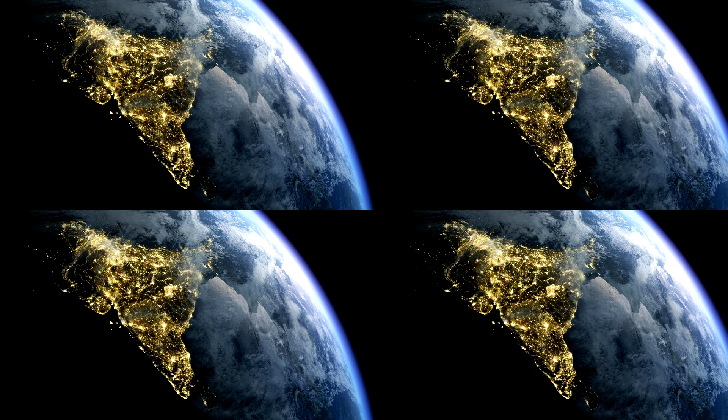So over the next 25 years, we will need to build new cities for 2 billion people. And if you take the US for comparison, that's building the entire US 6 times over with every nut and bolt and house and dog shed. Or if you take India, that's 4 times that. If you take the Bay Area, including San Jose, San Francisco, various bridges, that's 240 times over in 25 years. That's about the time when I intend to retire, so I will see most of that.

And the challenge is not so much global population growth; you will see that we will plateau at around 10 billion very soon. It's urbanization. To get the world into a work-sharing society, people need to communicate, and that's essentially why we chose to live in cities when we left hunting and gathering behind us. And if you see where urbanization needs to happen, it's interesting. It's predominantly in parts of the world that are catching up.

So everyone wants to get where Japan, the US, and Western Europe are, around the 80-85% mark. China is now above the world average, which is about 56%. India has to catch up, and not even on that graph is sub-Saharan Africa, which will be the biggest future growth region. China needs cities for about 200 million still. India, 300 million, that's all in the next 25 years. And sub-Saharan Africa, in excess of 600 million during the remainder of my professional career.

And the challenge with that is it's all new cities, right? So it's not including a single building that will need to be replaced. The lifetime of a building is between 20 and 40 years, so you can add buildings for 1 billion people on top of that. Two challenges go with that: feasibility and, perhaps surprisingly, identity.

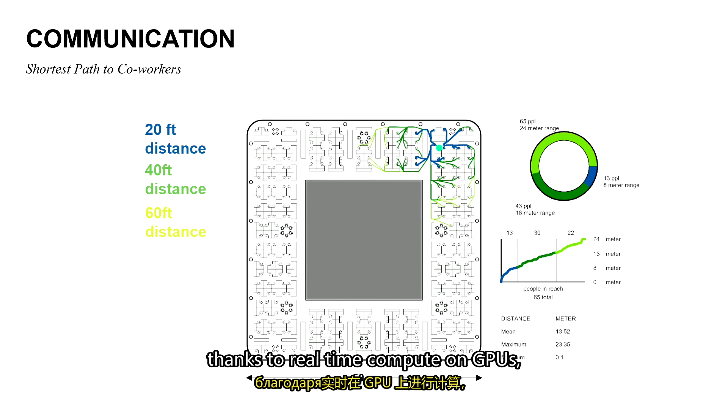And if you think about cities being communication engines and offices the place where that communication happens for the purpose of our economy, that is something that should be at the center of every building design. Unfortunately, when you run the math on it, and you can do that quite efficiently nowadays, thanks to real-time compute on GPUs, you find out that most buildings work not very well for that purpose. So what we showed on the previous slide is actually proximity. That is in response to the Allen curve parameters.

You can then overlay that with different parameters such as human comfort, its orientation, like no one likes to sit in a corner, no one likes to sit to the back of an audience. And that essentially means that in the buildings we design today, like the typical high-rise building with a core in the middle, about 65% of the space is used efficiently, and 35% is actually stuff that doesn't really cater to what you built the building for in the first place, which is communication and IP generation.

So we can say that the building as we know it is a subject that we could improve drastically without reinventing a single technique in structural design. We could just build 35% less of it, or better, and reduce the mass of our cities just by looking at the efficiency of the layout of our buildings.

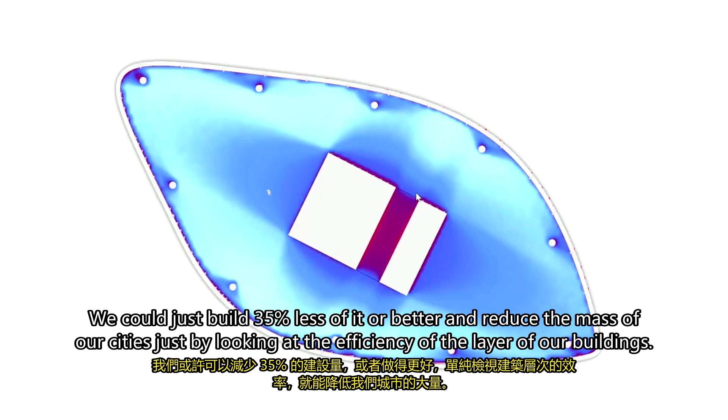And what we can do nowadays with real-time GPU compute, so this is code that we've been porting to CUDA, we can now give designers real-time feedback whilst they model their buildings on parameters like communication efficiency, human comfort levels. That's, I think, switching to yellow at the moment, so that's the comfort graph. So we can intuitively get real-time feedback on the quality of the spaces that we design, and you see that this also works with organic shapes.

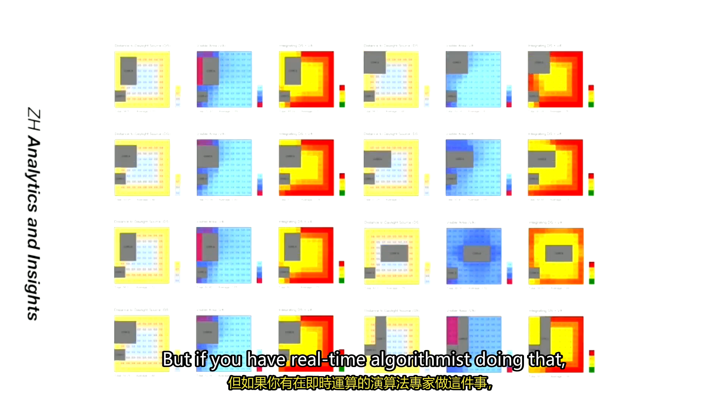And if you just look around here, no one sits in a corner, you might as well not build it and save a lot of material in the course. And this is a double-digit optimization potential you will hardly find in any developed industry. But if you have real-time algorithms doing that, you can also use reinforcement learning to automate that.

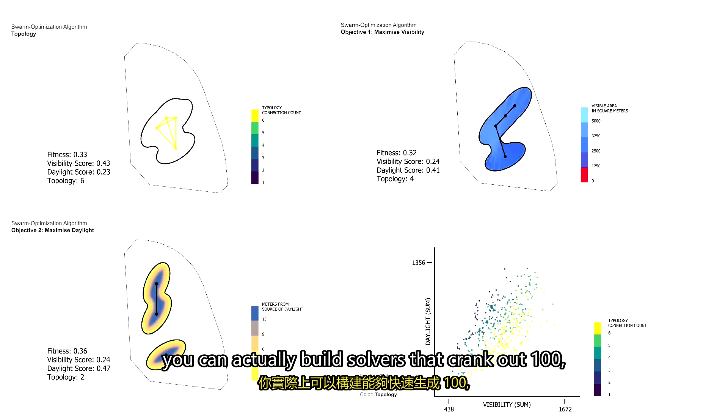So if you take the problem of where to place a core in a building or what shape a floor plate should have to work for the purpose of a building, which in the case of an office is communication, you can actually build solvers that crank out hundreds of thousands of options and optimize for certain parameters. And that results in forms that are very different from the kind of building that you see in a typical CBD. So in this case, this is a study we did for an office tower.

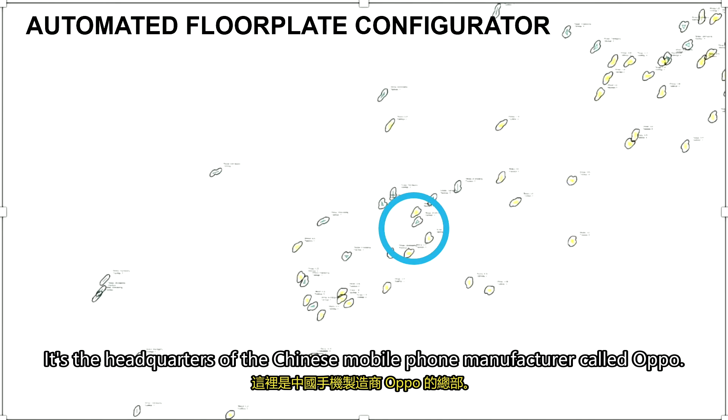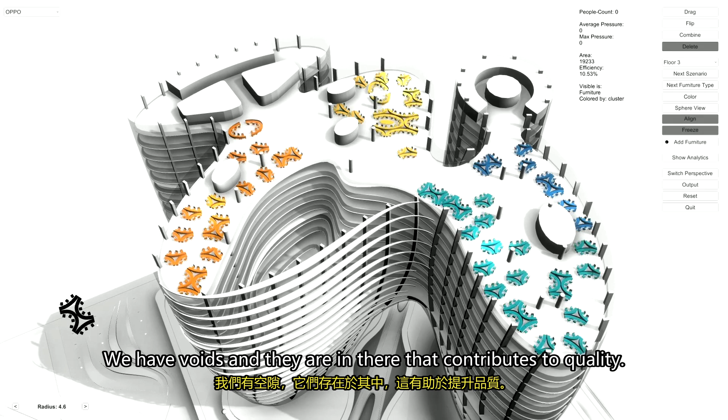It's the headquarters of the Chinese mobile phone manufacturer called Oppo, and we're building this in Shenzhen now. And the sweet spot of the different parameters, which were mostly about team organization and communication in the building, was a shape like this. We do not build what doesn't work for that purpose. So it looks a bit like a Swiss cheese. It's very airy, it's very light. We have voids in there and daylight in there that contributes to quality. And we can organize teams according to the social network graph of the company quite efficiently on those floor slabs.

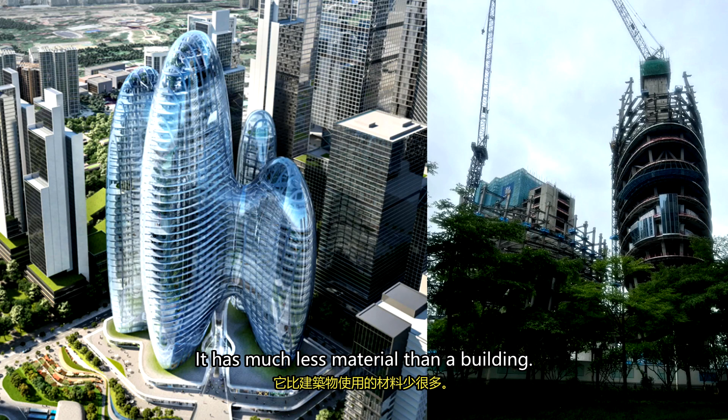Just quickly show you how this looks like. So this is how it will look like. It's perforated. It has much less material than a building. It's lighter through that, and it's actually coming up. So hopefully soon we can see and get some metrics in return on how that works.

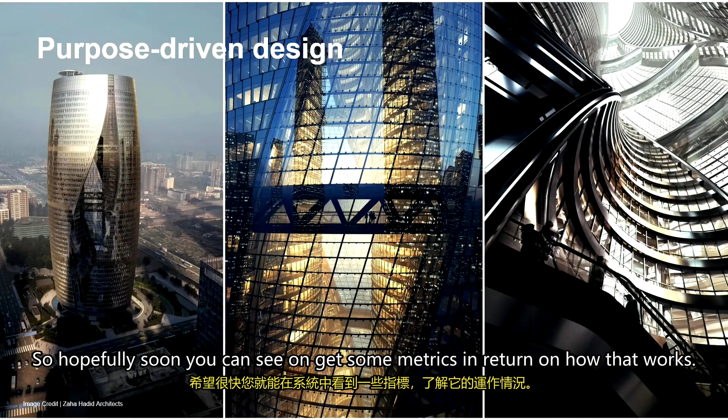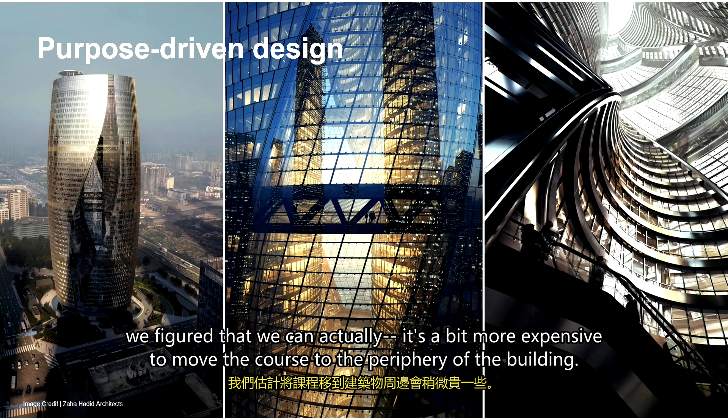Or here, this may look like a standard building from afar, but if you look closer, this is the building that we finished in Beijing. These are all photos. These are not renderings. With a very similar methodology, we figured that it's a bit more expensive to move the cores to the periphery of the building, but we get much more efficient communication in the building in return. And by providing those metrics, we were able to convince our client to go for this rather unusual approach.

And what we have in the center, where you typically have a core that you cannot see through, is a 200-meter tall atrium. It's the tallest in the world at the moment. And that means I cannot only look across my floor plate. I'm in an organization. I can look 16 floors down and wave to someone there. So I have a much more present state within my organization and can basically work in a dense urban situation like in a kind of medieval marketplace where I can see what everyone is doing. So it has massive benefits to communication within organizations.

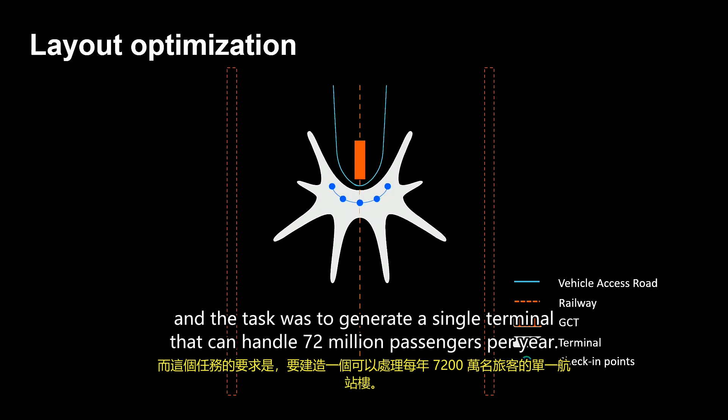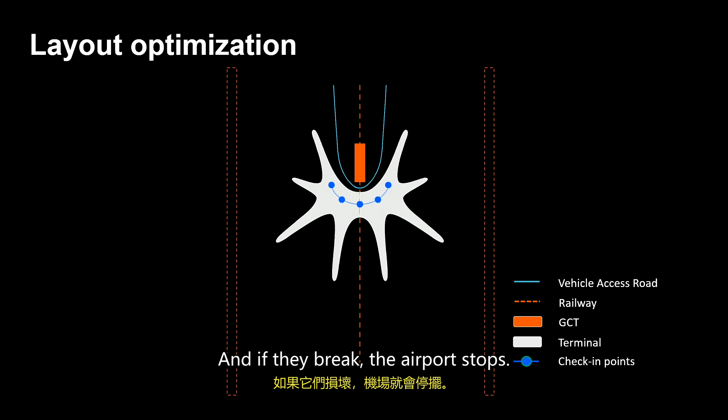Or we can use computer graphics and accelerated compute for layout optimization of large buildings. So this is a good example where we can optimize buildings for pedestrian commute times. And to give you an idea, this airport is in operation since 2019, and the task was to generate a single terminal that can handle 72 million passengers per year. The reason why the desire was to have a single terminal is because in a normal airport you have APMs, automated people movers, these little trains going back and forth, and if they break, the airport stops. And if you are able to get all of that under one roof and everyone can walk everywhere, you solve that problem, or you take that risk away.

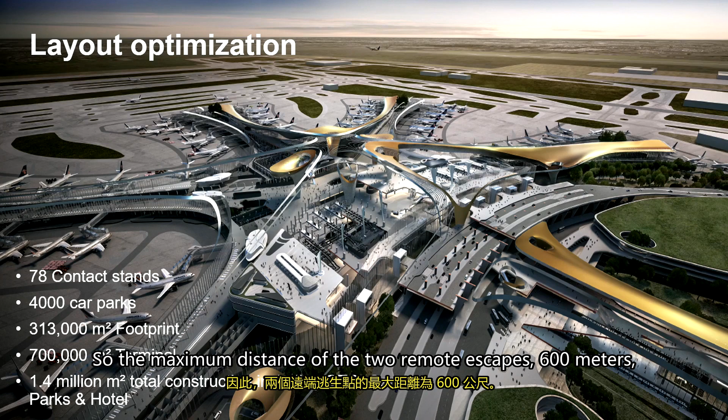And we optimized, with very similar algorithms, the geometry for walking distance. So the maximum distance between the two remotest gates is 600 meters, 15 minutes walking. And if you look at the capacity, this is almost on par with LAX. LAX is about 80 million passengers per year, so within 10% of that. LAX has 9 terminals, and here we get it into one single building, about 700,000 square meters.

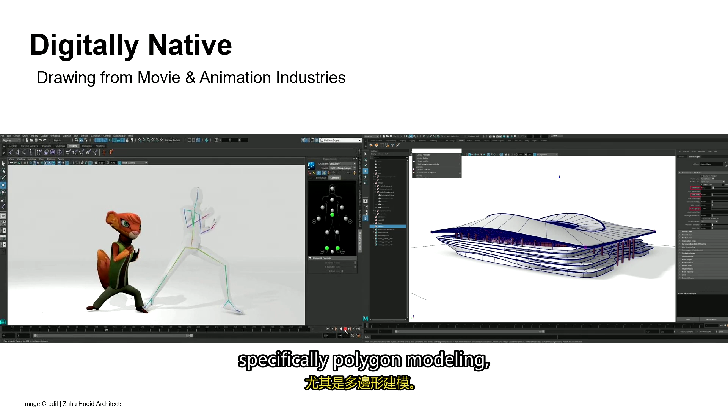So what are we doing in a tech conference? We can look at the technology stack we are using to power all of these buildings. Historically, technology at Zaha Hadid Architects has been in the service of the user experience. But we use a zoo of software, borrowing from various industries, not only AEC, but gaming, movie and animation, to create our buildings. And this creates a lot of source files and also a lot of multi-format files. We are one of the few architectural companies that also borrow from the animation and gaming industry. So we use Autodesk Maya for modeling, specifically polygon modeling, which is very intuitive for our designers to model and iterate quickly.

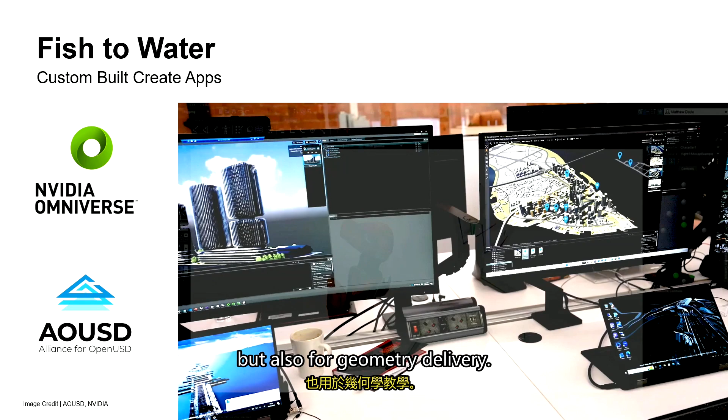So in that sense, you saw the gamut of software we use. We were already taking a look at Universal Scene Description, and when Omniverse and the Alliance for OpenUSD was created, it was natural that we jump onto it. So with all the APIs of the NVIDIA Kit app, we were able to create our own version of that application for both geometry creation and geometry delivery. What Omniverse enabled us was to create a repository of geometry and toolkits, bringing all of them into one location. These toolkits span multiple domains: geometry processing, digital and robotic manufacture, environmental simulations, data visualizations, and AI.

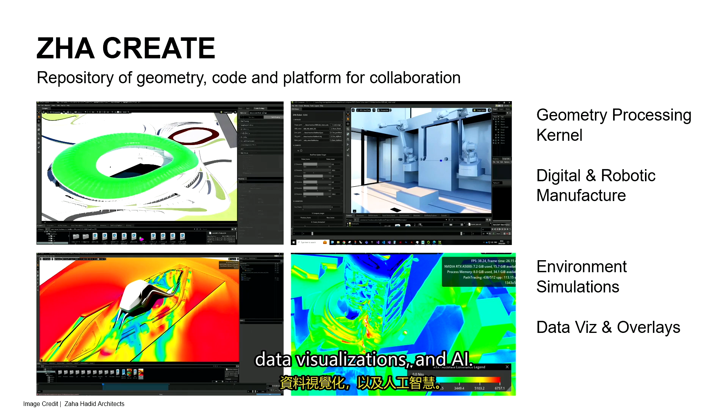So diving a bit deeper into each of those aspects, looking at the geometry kernel. This kernel is called ZSpace. This is a kernel we have been developing for the last 10 years, looking at both content creation, where we are borrowing from geometry processing and computer graphics, looking at robotic and digital manufacture, but at the same time developing tools for later stage delivery of the project, looking at geometry optimizations or rationalization for manufacture,

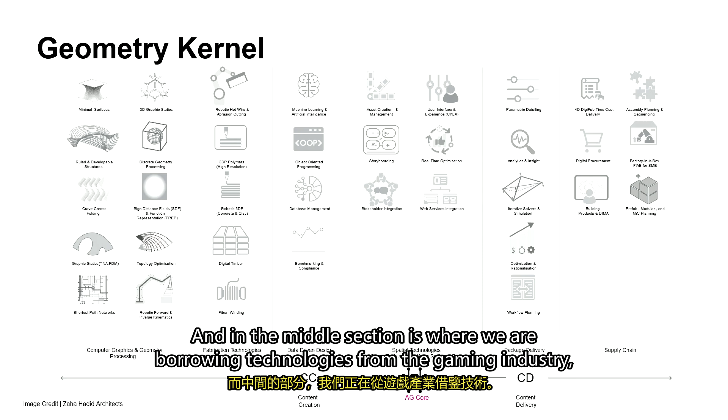the sequence of construction, etc. And in the middle section is where we are borrowing technologies from the gaming industry, looking at game tech and platform design, which we will touch base on in a bit. So the research borrows from multiple institutes, specifically looking at architectural geometry. We have collaborative setups with corresponding institutes which look into that, like TU Vienna, where the architectural geometry group is, ETH Zurich, where the Block Research Group is, and also Carnegie Mellon, and so on.

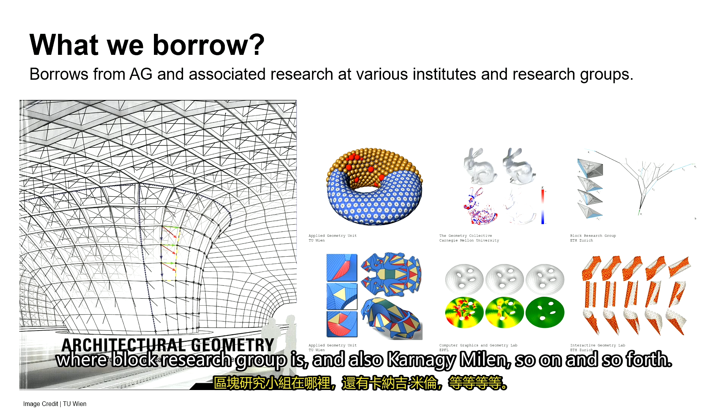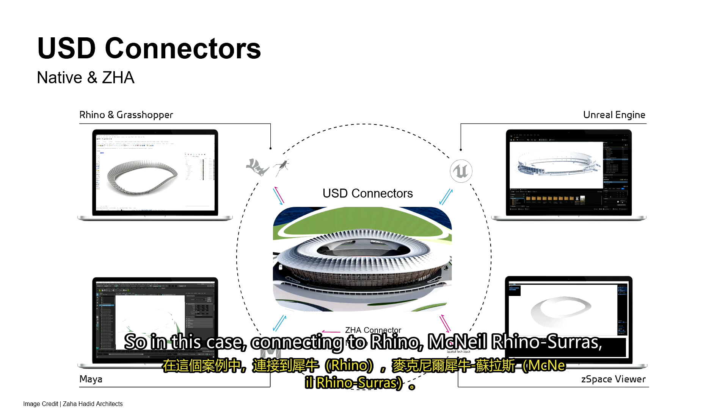So when we started looking at USD, we were looking at what are the native connectors. There were native connectors for Maya and Unreal, but we had to build our own custom connectors where they were not available, or if the vendor is still in the process of making them. So in this case, everything in magenta are custom connectors we built. For example, connecting to McNeel Rhinoceros, we built our own connection.

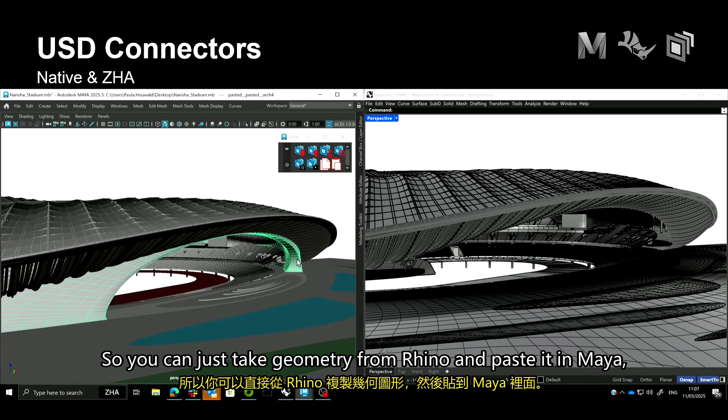So what this has enabled is, because we build our own connectors between the various platforms, it's as simple as copy pasting from one platform to another. So you can just take geometry from Rhino and paste it in Maya, or the same thing from Maya to Omniverse, and so on. It becomes very easy for the designer to navigate between the various platforms we have in the office. We have tested these workflows across multiple project scales, starting from small scale pavilion projects to larger scale stadiums and infrastructure projects to even master plans.

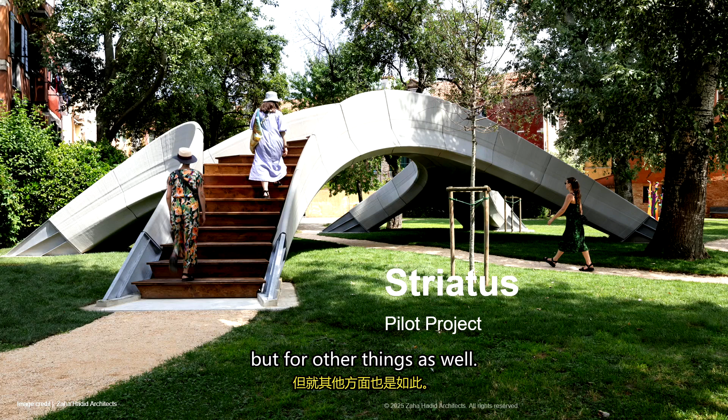As with all technologies, we start with some small technology demonstrators to showcase a proof of concept. And in this case, Striatus was a proof of concept we wanted to develop not only for USD, but for other things as well. Typically, we do these kinds of small-scale projects to test technology because they become the beacon for making it into commercial projects. From our experience, the distance between a research project and commercialization has been about 5 to 8 years.

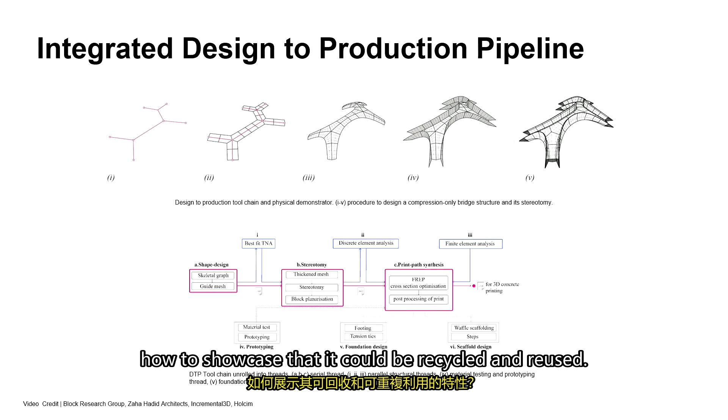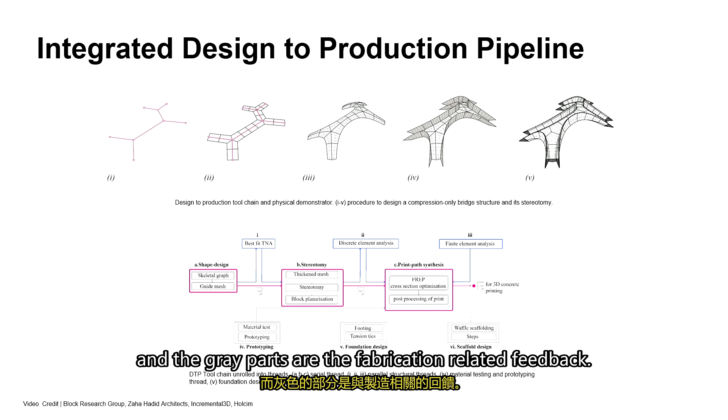So in this case, we were looking at concrete and trying to make it sustainable. These two words generally don't go together if you know about concrete, but the main objective of the project was to showcase the sustainability aspects of concrete by reducing the material, and to showcase that it could be recycled and reused. So how were we doing this? This was done through an integrated design to production pipeline between designers, engineers, and fabricators. The pipeline you see in pink are all the design procedures, interspersed with engineering feedback, and the gray parts are the fabrication-related feedback.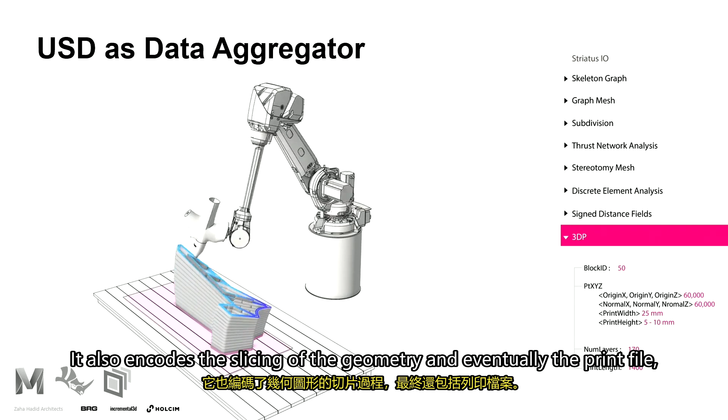So in this case, we were using USD as a data aggregator. You can see on the right, the design procedures were all captured into the file format. Every step, whether it is structural analysis, fabrication-related information, or design procedure, was captured. These are all sequential design decisions we make in an architectural project, and it was important to capture and embed them so that we don't lose that data. It also encodes the slicing of the geometry and eventually the print file, which is sent to the robot. All of that captured in one single file.

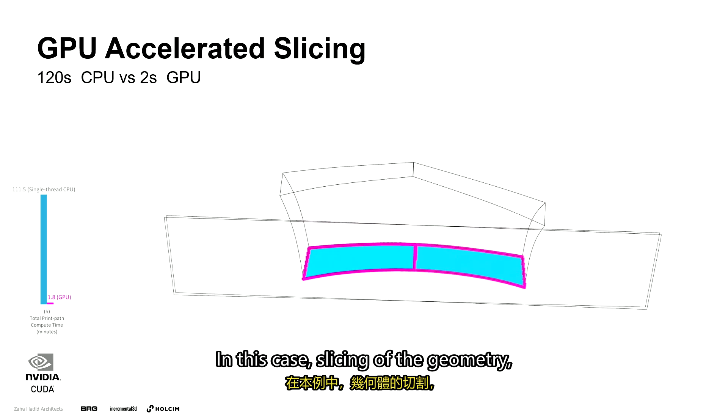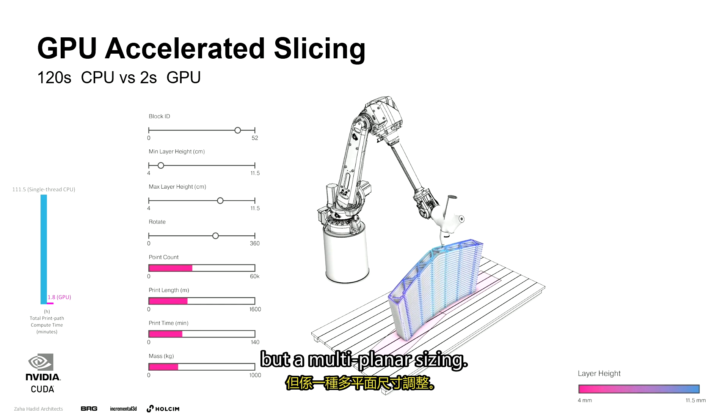Apart from that, we're also looking at NVIDIA CUDA for GPU acceleration. In this case, slicing of the geometry, which might take up to 120 seconds on the CPU, is now accelerated to 2 seconds on the GPU. But you can also see that this is not a simple slicing in Z, but multi-planar slicing. Each of the planes is actually perpendicular to the force flow it is going to experience in the final design of the bridge.

What this enables, because you are perpendicular to the force flow, is to minimize and deposit material only where it's required. This also got rid of the requirement for steel reinforcements. So this is pure concrete, with no steel reinforcements to keep it in place.

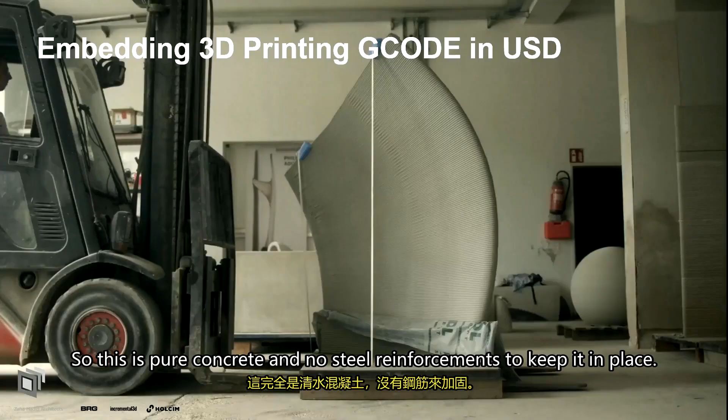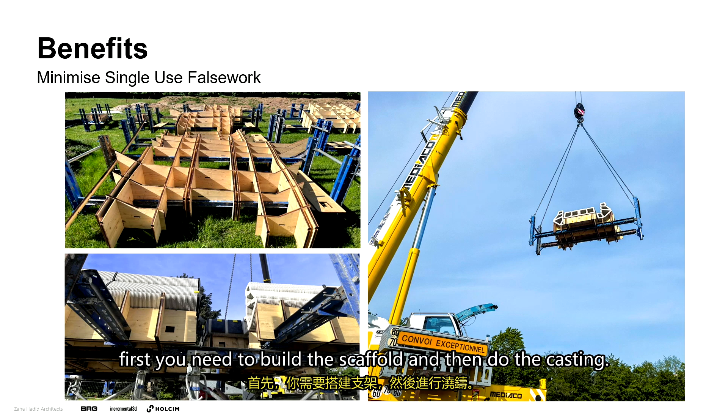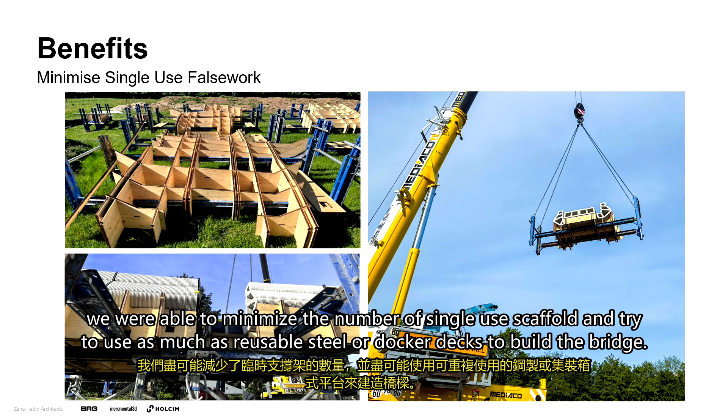Such technologies, because of that integrated design to fabrication pipeline, are enabling us to minimize single-use falsework. If you have experience doing concrete, first you need to build the scaffold and then do the casting, and if the scaffold is single-use, it becomes waste. Because of the integrated pipeline, we were able to minimize the number of single-use scaffolds and use as much reusable steel docker decks as possible to build the bridge.

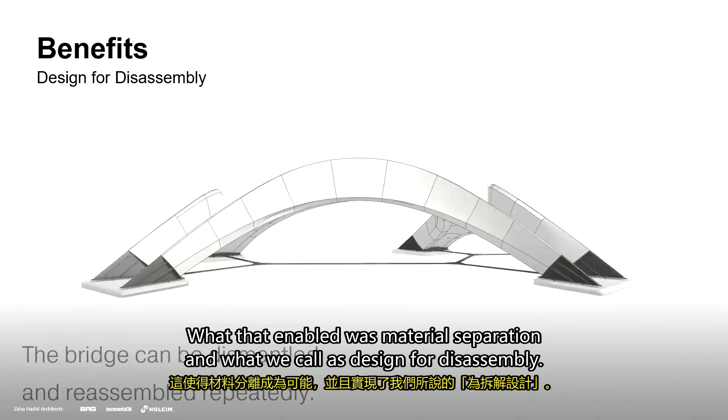In terms of material separation, I mentioned there was no steel reinforcement, but there was steel at the anchors. What that enabled was material separation, what we call design for disassembly. So you can disassemble the bridge once its use case is done and reassemble it somewhere else, showcasing reuse of the same components. But at the same time, because it's materially separated, you can also reuse the materials themselves.

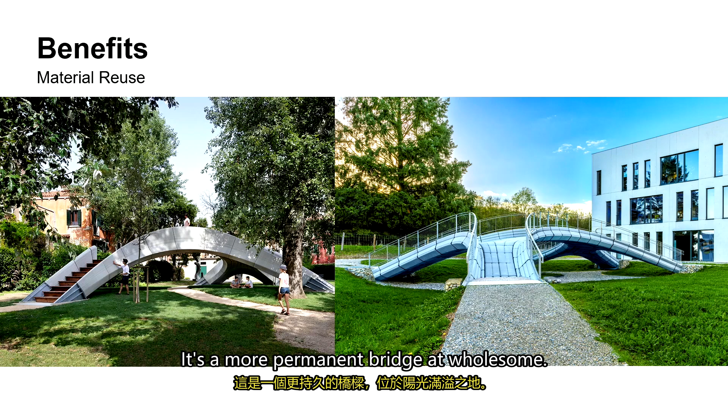This was in 2021, we did the first version of the bridge for the Venice Biennale. It was there for about 6 months, then it was easier to crush and repurpose it into a new, more permanent bridge at Holcim. So we reused 80% of the material from the first version to build the second one.

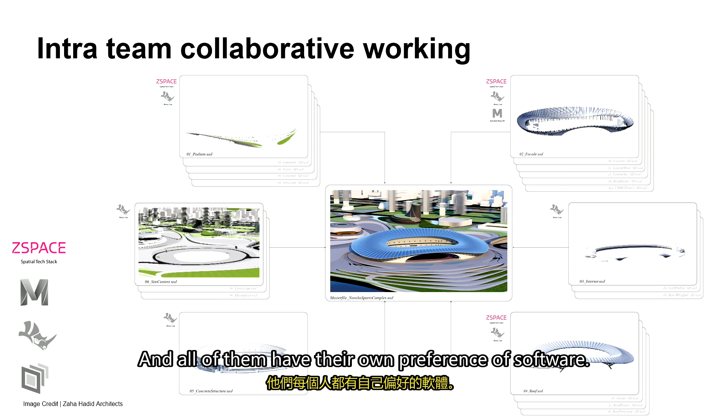Moving on to larger scale projects, how we are using Omniverse and USD in larger scale projects. In this case, it's enabling intra-team collaborative working within ZHA. We have people looking at landscape design, facade, structure, roof, etc., and all of them have their own preference of software. We saw the zoo of software we were using - some are interested in Rhino, some in Maya, some in Blender, some other softwares.

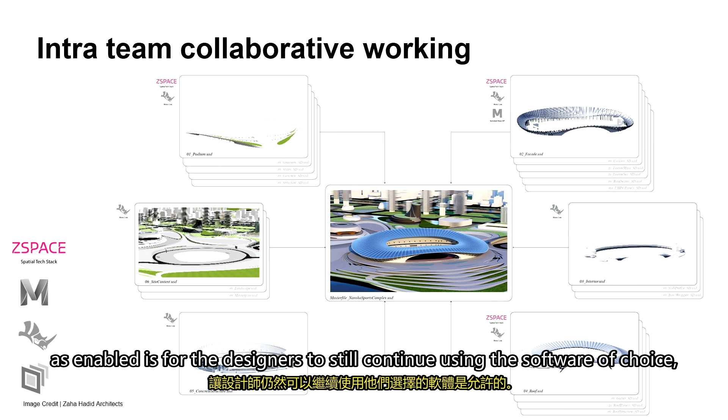So what USD as a file format has enabled is for designers to still continue using the software of their choice, but create an aggregator in Omniverse where someone at the project managerial level is just looking at that master file.

What this setup enables is quick and multiple iterations whilst being aware of the other scopes. This is going on quickly, in this case looking at facade design, but whilst being aware of the structure, or looking at a cable net roof of a stadium whilst being aware of what it's going to latch onto.

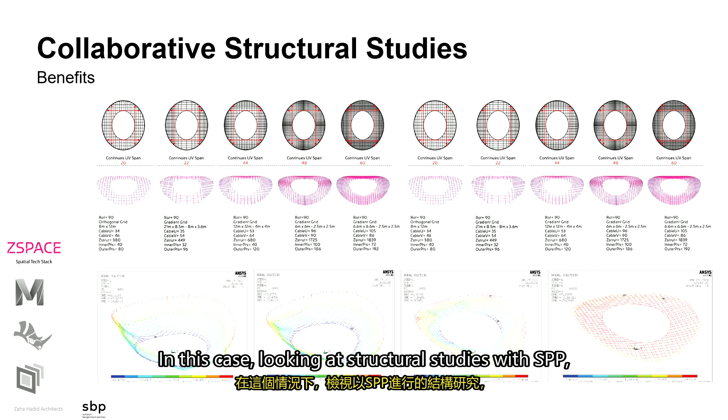It's not only intra-company, it could also be collaborative studies with engineers - in this case, looking at structural studies with SBP, looking at various topologies we as designers want to explore, while getting feedback on the structural performance of each typology, so you can choose the best one.

Can we press play on the video? This is a roof of the stadium. I'm not able to play the video. It's not working. Are you able to press play there? Just move the mouse pointer to the slide, and there should be a bar, and in an ideal world you can press play. Nope. I think we need to skip that.

What you would see there is a real-time solver for geometry optimization. When interacting with the design model, we use compute resources in Omniverse to planarize the panels. These are quad panels, so by definition they are not necessarily planar, and the difference between a planar panel and a curved panel in construction is a cost factor of about 10. You have a quite complex multivariate equation to solve to get your panelization into shapes that you can feasibly build. With GPU compute, we can solve these problems in 10 to 15 seconds, meaning we can run an enormous amount of iterations over shapes that with traditional technology would take literally weeks to assess.

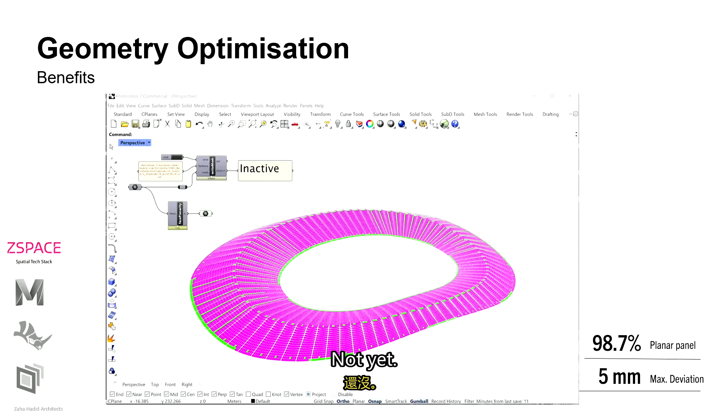But yeah, I think the PowerPoint is stuck, so it may not be going. Can we advance still, or has it all crashed now? Can you still advance the slide? No. Ah, there we go.

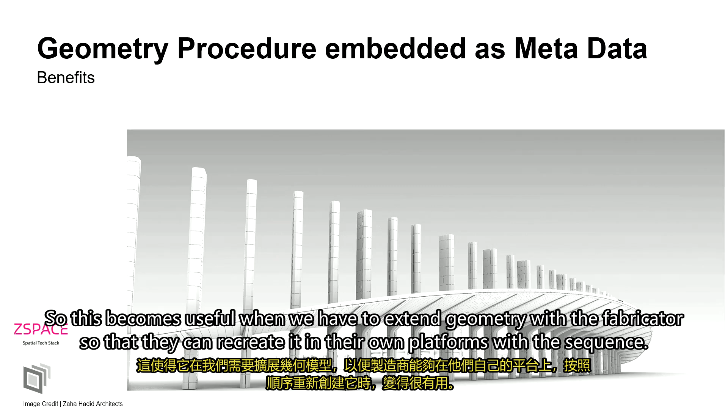The other aspect of geometry optimization is that we are able to capture the procedure of how the geometry was constructed as metadata in the same file. This becomes useful when we exchange geometry with the fabricator, so they can recreate it in their own platforms with the sequence - it's kind of like an IKEA manual of how to recreate the geometry.

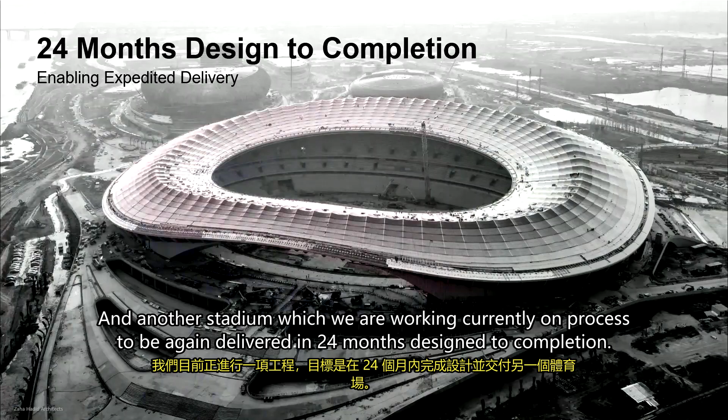What this enables is expedited delivery processes. This is a 60,000-seater stadium, which was designed to completion in 24 months, and this one is already complete now - showcasing the cable net roof. And another stadium, which we are currently working on, is in process to again be delivered in 24 months, designed to completion.

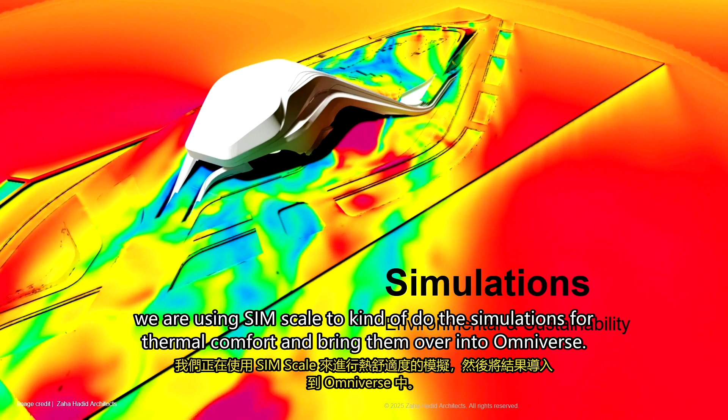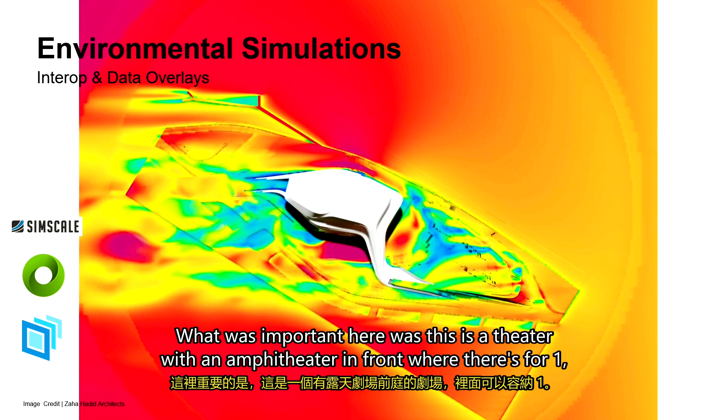Moving on, looking at the environmental simulation aspects. In this case, we are using SimScale to do the simulations for thermal comfort and bring them over into Omniverse for visualization. What was important here is this is a theater with an amphitheater in front for 1,000 people, and we wanted to capture the thermal comfort of that area.

And this is how the project looks. It opened in 2024, and you can see the amphitheater in front.

At the same time, we are also looking at the daylight simulations for the interiors to see how daylight is being captured. This is again inside Omniverse, trying to visualize the daylight comfort inside the building, and the same simulation was then built in actual. So this is how it looks on site now after the construction.

Another environmental aspect we are looking into is something called hotspot. Light concentration or hotspot is concentration of sun rays into one particular point in the context. If you remember, there was a project in London where the hotspot was actually burning a car or the gate of the neighbor. So it was important to capture these things in the pipeline.

Previously we had to send these things out to an engineer to get feedback, and it was outsourced. Now we can capture them in our in-house design pipeline. Previously one iteration took a week, but now with GPU compute, it's almost real time. You can get feedback on all the geometries happening in real time.

In this sense, you can optimize the geometry for the various solar concentrations and then rationalize the facade such that you are avoiding these kinds of concentrations. That's also part of the OPPO headquarters, which Niels was mentioning previously. This is the rationalized facade for it.

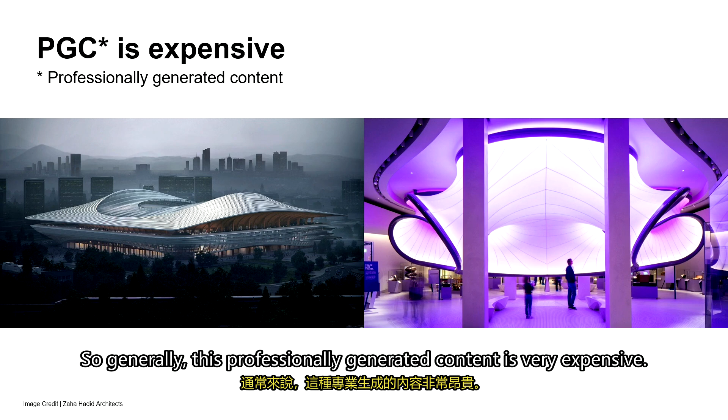Another aspect we actively work on is game technologies. In this case, we saw all of the professionally generated content for creating the framework. Generally this professionally generated content is very expensive, because you need specialist teams to work on these things over multiple periods of time, and at the same time it's also time intensive. You need to create all of these technology demonstrators, understand the drawbacks, and then plug it back into the design pipeline for the office to use.

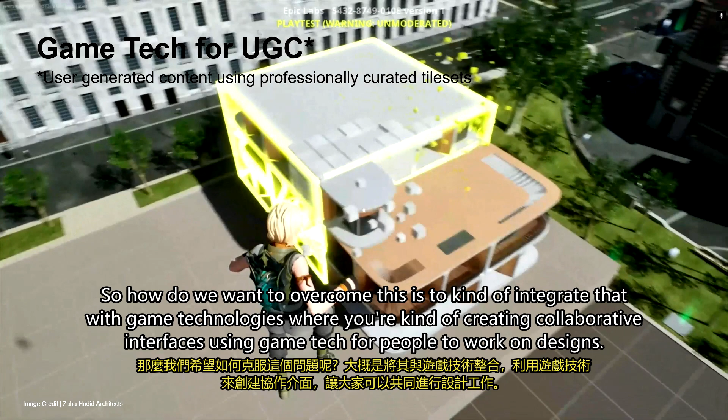So how do we want to overcome this? By integrating game technologies, creating collaborative interfaces using game tech for people to work on designs. You can then have multiple collaborators working and also crowdsource the problem.

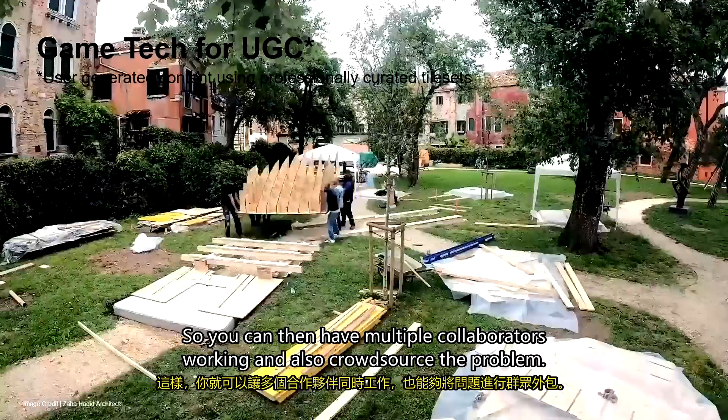What we are doing as designers here is to create professionally generated tile sets, which are curated for various use cases, be it offices, residences, commercial buildings, etc. And the gameplay enables these combinatorics to be explored.

In this case, you can see this was a collaboration we did with Epic Games, where this is a game where people in groups of 4 or 8 are collaborating to create a varied city. Previously, we identified that we had to create variation in new cities. This is one way to do it, because you can capture in a tile set the variation according to cities or based on its geographical location.

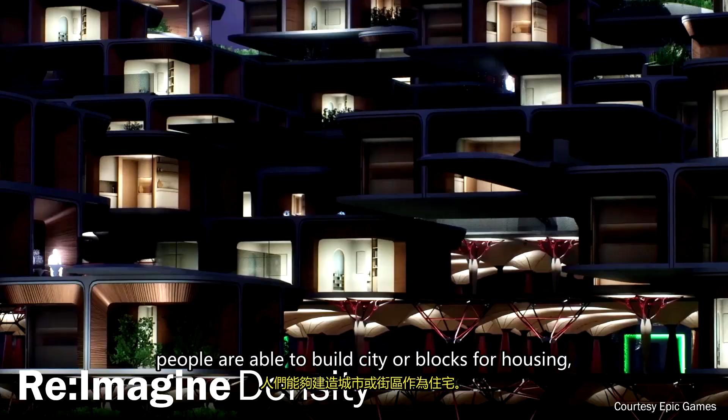It also enables capturing various mixed-use scenarios. In this case, each program is a different scenario, and through the gameplay, people are able to build a city or blocks for housing, looking at the density out there, so on and so forth.

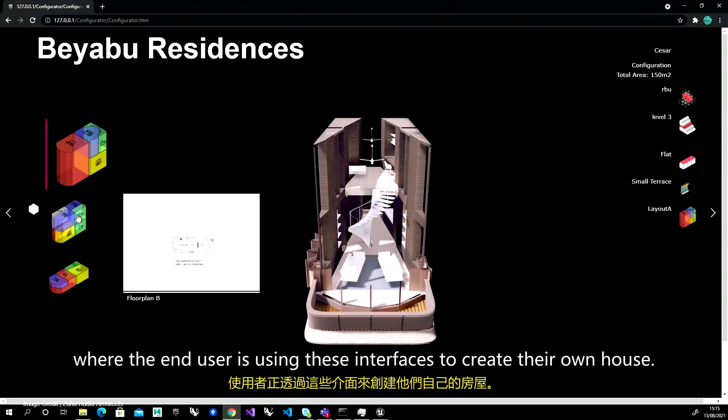But the same technology can also be adapted into configurators for smaller scale projects. In this case, the same game tech is adapted into a configurator on the web, where the end user uses these interfaces to create their own house. This was a project called Beyabu Residences in Roatan, where the end user logs into a web interface.

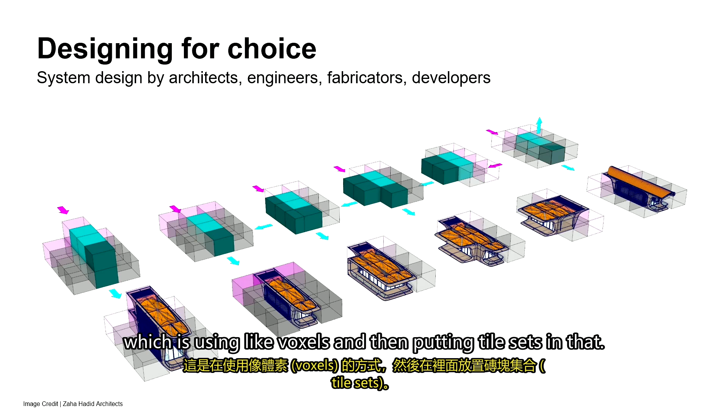We are using game tech, using voxels and then putting tile sets in that. So what it's enabling is for not only end users to create their own units, but also doing combinatorics of geometry to enable the variations possible, while tracking all the costs associated with that.

Another aspect we are currently exploring is generative AI. We actively use it within our production pipeline, looking at data sets of built projects and renders. This becomes the data set we train our custom LoRAs on, and these LoRAs are specific to exteriors, master plans, interiors, and graphic design.

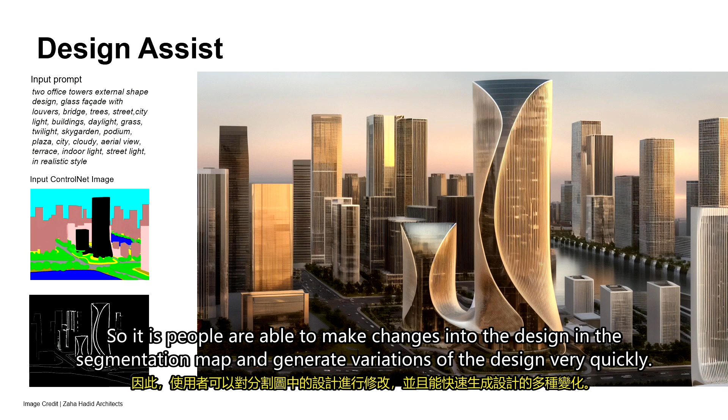This enables us to create ideations at a very early stage. People use it for ideation of design projects, but more importantly as a design assist tool, making changes in the segmentation map and generating variations of the design very quickly. Because it's embedded into our design pipelines, in Rhino or Maya, people are able to call these tools and create variations of the facades very quickly.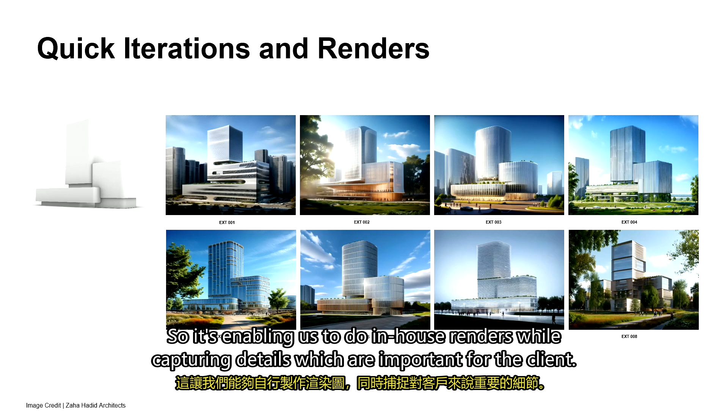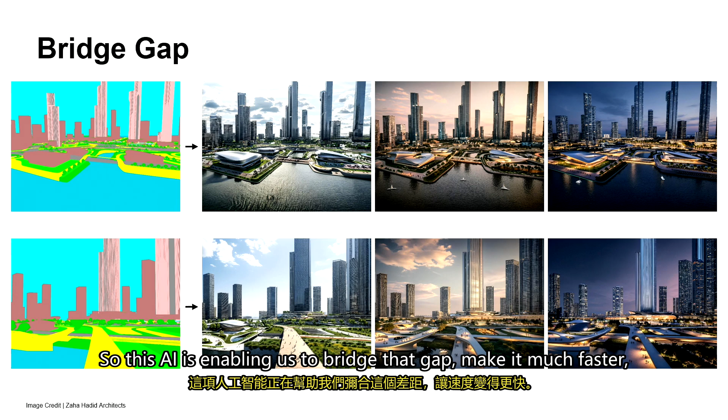So it's enabling us to do in-house renders while capturing details important for the client. This bridges the gap between the abstract models architects are working on and showcasing what is required for the client. Clients generally respond more to the renders and how it is spatially working, so AI is enabling us to bridge that gap, making the process much faster and smoother.

It's not only necessary for clients on physical construction projects, but also on the game side, the same kind of requirement for game design as well.

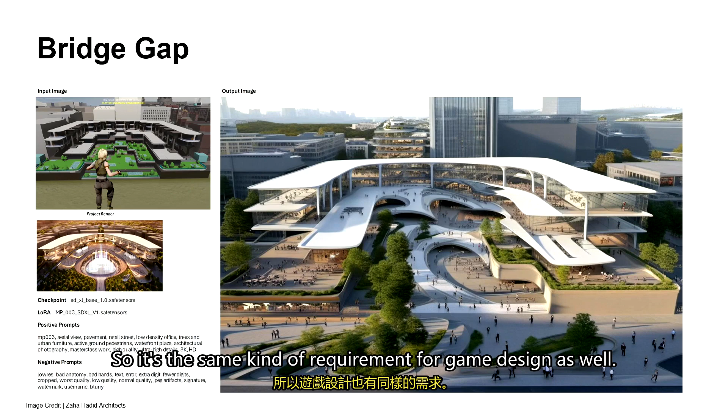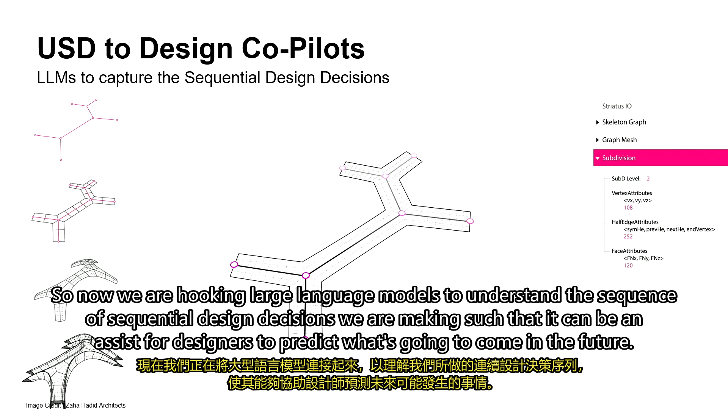More importantly, where we are heading with AI and USD is to create design co-pilots. We saw previously how we are capturing all the sequence of steps to create the procedural geometry. Now we are hooking large language models to understand this sequence of sequential design decisions we are making, such that it can assist designers to predict what's going to come in the future.

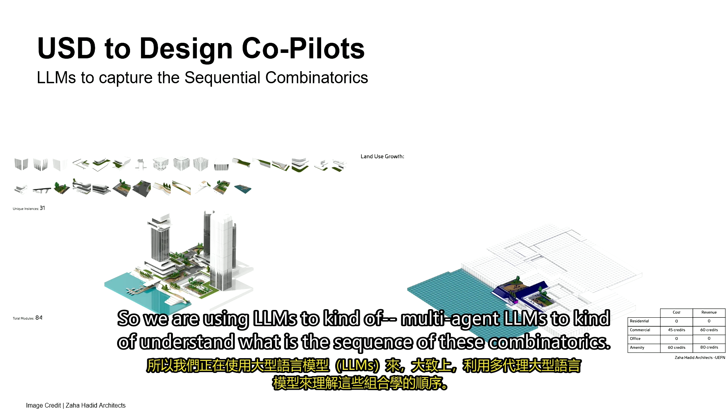At the same time, it's also looking at the sequential gameplay of the city and city master plans - on the right you can see the sequential gameplay. We are using multi-agent LLMs to understand the sequence of these combinatorics, so that before you release the game, an ML agent can run through all the possible game solutions and make updates as necessary.

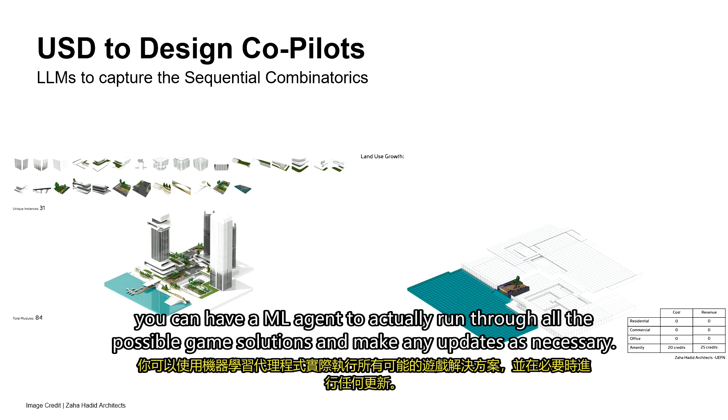It's also becoming an assist in predicting simulation results, looking at topology optimization, where as designers at a very early stage, you don't need 100% accurate results. Even 70 or 80% accurate is good enough. On the right, the prediction of topology optimization on a chair is about 60 to 70% accurate, which enables us to make sure we can iterate very quickly.

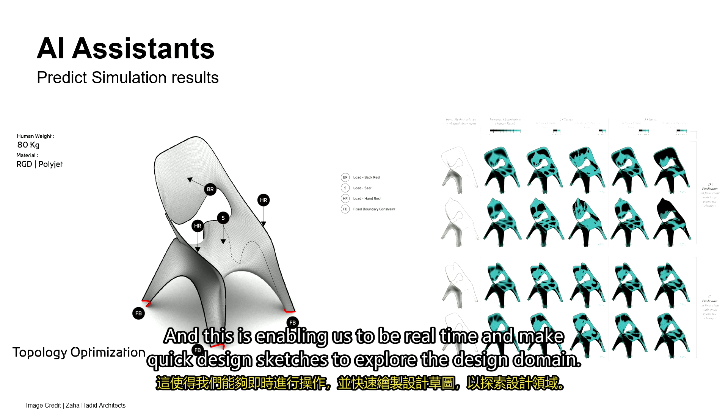Typically, topology optimization or finite element analysis takes a long time to run, and this is enabling us to be real time and make quick design sketches to explore the design domain.

Thank you. Oh, we are almost out of time, and I think we are landing bang on target.

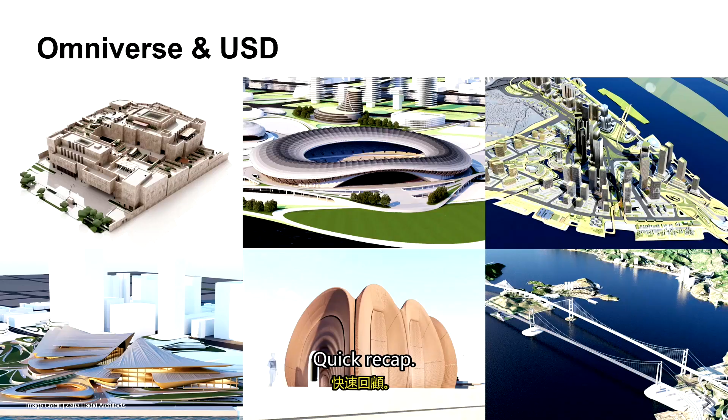Quick recap: we talked about how USD helps us centralize data in a format we can process uniformly, regardless of the zoo of authoring tools commonly used in the construction industry. This enables us to parallelize workflows which are traditionally sequential - having to wait for the output of one party before starting the next step - with everyone working in a uniform data environment, and in parallel, putting many things on parallel tracks. We have mutual visibility of what is happening on the project, allowing us to significantly accelerate project delivery, ultimately making projects cheaper and design more accessible.

Another benefit of centralized data and application-independent data repositories is that we can then build pipelines and toolkits on top of those data repositories, which means we can now afford to build specialized tools and pipelines that are built upon USD, and we can interact with data on that platform regardless of where it has been authored. And that is particularly interesting with a perspective to AI.

We talked about robotic and digital manufacturing, the enormous efficiency gains we see, how we can make buildings lighter and, most importantly, easier to recycle, because what traditionally went to landfill can now be separated and reused. And we talked about crowdsourcing design, and maybe coming back to what I said, one of the two biggest challenges in scaling up cities is the question of identity.

And this is a fantastic way to actually get input and make design more varied and create an idea of ownership and identity with places, because computer gaming is ubiquitous. Everyone has their mobile phones. I believe the average age of a gamer at the moment is 36. You have it in all parts of the world. So there's a fantastic interface to combine combinatorics and configurator-like environments at large scale with an audience of future cities.

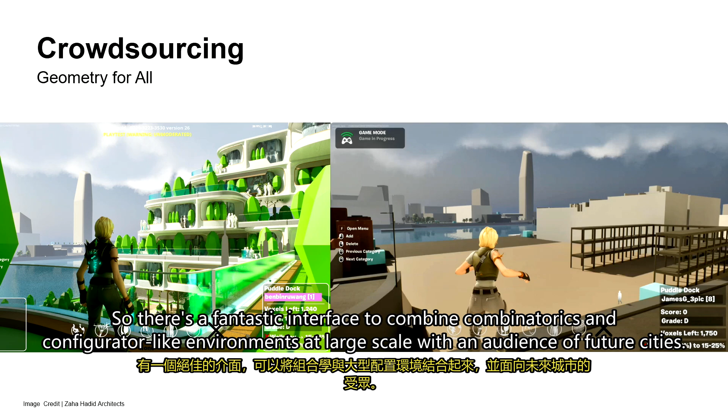And then finally, of course, every architect's dream, compute acceleration, massive gain for us. And to maybe quote Jensen Huang again, we are time limited as architects. So we always have a finite time window. And the more we can iterate over a problem, the better the solution gets. And hopefully that then also leads to better cities.

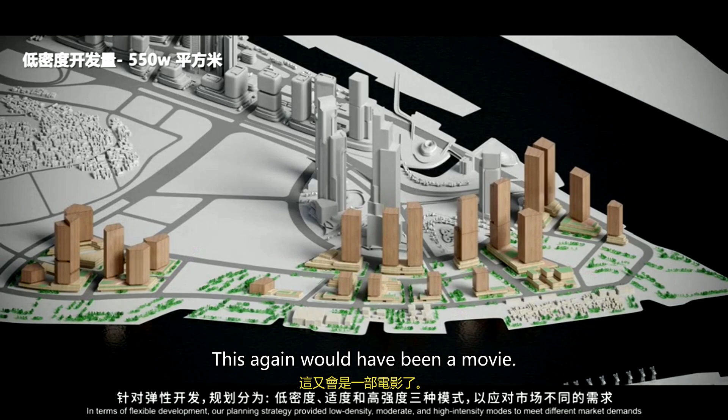This again would have been a movie. Let's see whether we can squeeze some more out of it. No, it's just stills, but doesn't matter. We're at the end. And thank you.

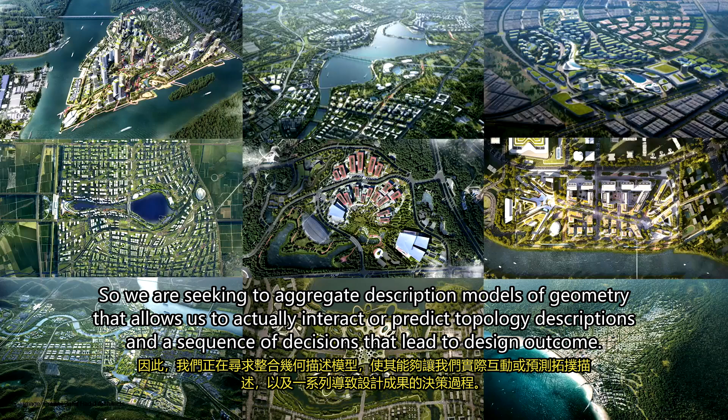And what is most important for architects when designing is an understanding of topology. If you describe topology, you're again in the domain of language. So we are seeking to aggregate description models of geometry that allow us to actually interact with or predict topology descriptions and a sequence of decisions that lead to a design outcome. And there are, broadly speaking, two routes.

So I think the bigger challenge at the moment is not necessarily how we process the data, it's where we find it and how we generate it. But it's doable, and I think with an increasing awareness of the benefits that these models can generate, it will get easier to accumulate. And again, that's where open data formats come in, right? If you have application-independent data formats that allow an industry to accumulate data across projects and applications, it's more likely that you amass a critical mass to then make effective use of large language models.

And what we see as a first application would be a design predictor. So very similar to having autocomplete. If you work in an application environment, you have a record of sequential design decisions that you take. You could ghost in or propose potential next one or two steps that you can then quite efficiently pick and use to complete the design step by step.

And I believe that's quite tangible, and we are already experimenting with that. Well, that's wonderful. On one of the occasions in the past, we have used large language models, vision language models, to generate sequences of coded text which could be transformed back into image segmentation models. We, in a way, taught the language model to generate some codes. That code could be converted back into an image to do some segmentation.